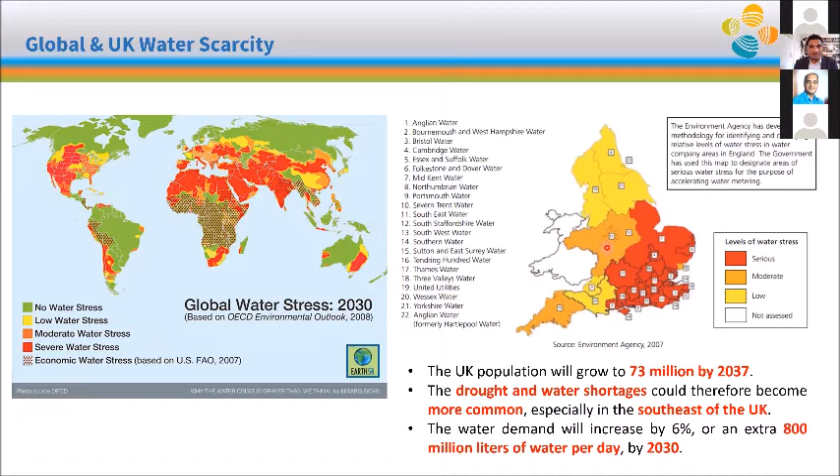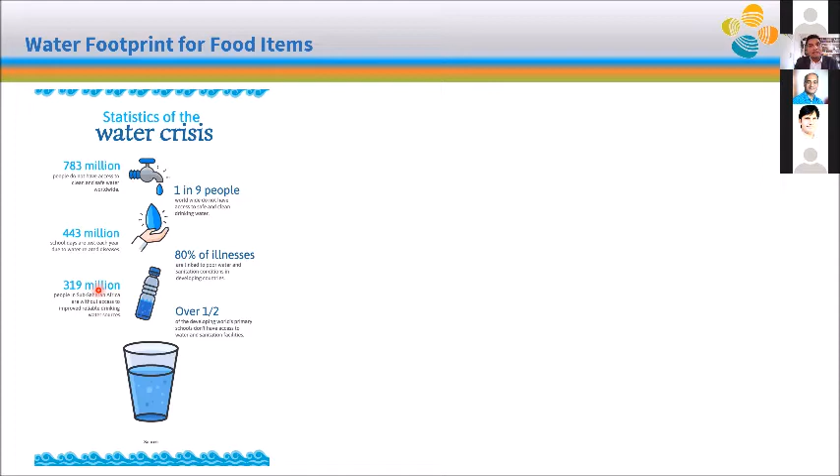This picture is actually very interesting because this water stress is, of course, mainly related to industrialization, but also there is another factor, that people always try to live in better conditions. So urbanization also plays a very big role in water scarcity.

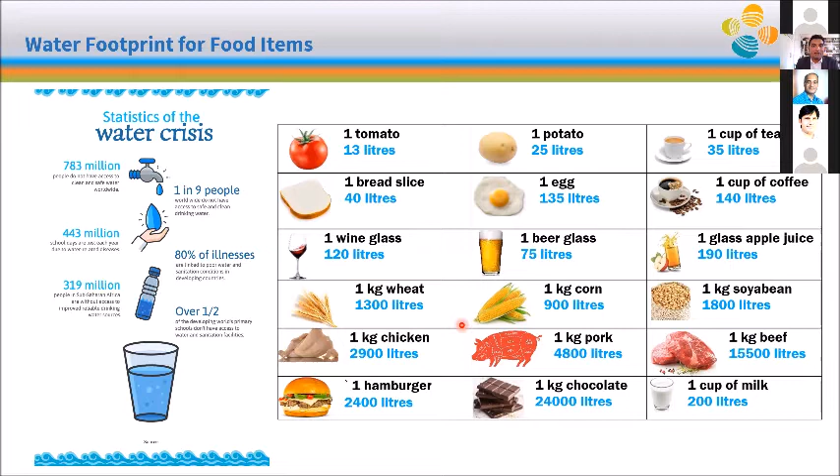And over here, we can see the food that we normally consume on a daily basis, and most of the time we actually don't realize how much water is consumed. Even when we waste the food, indirectly a lot of water is consumed to produce that food. For example, 1 kg of chicken is around 3,000 liters. But I was quite shocked to see that 1 kg of chocolate is around 24,000 liters of water. So many things we consume on a daily basis, and sometimes we waste as well, and we don't realize how much water is consumed to produce those food items. That is actually really shocking, the figures over here. And one of the reasons is actually inefficient agriculture process.

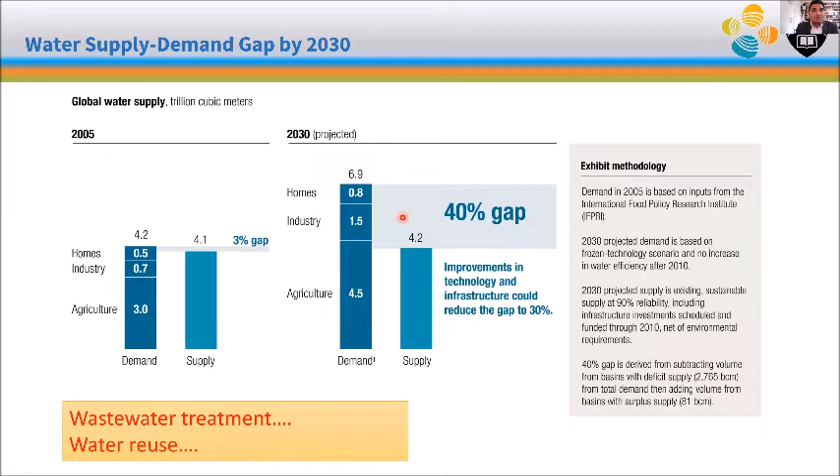So the alternative solution is a seawater desalination process, because seawater is available, and that is the most feasible and practical solution to produce water to overcome water scarcity in the near future.

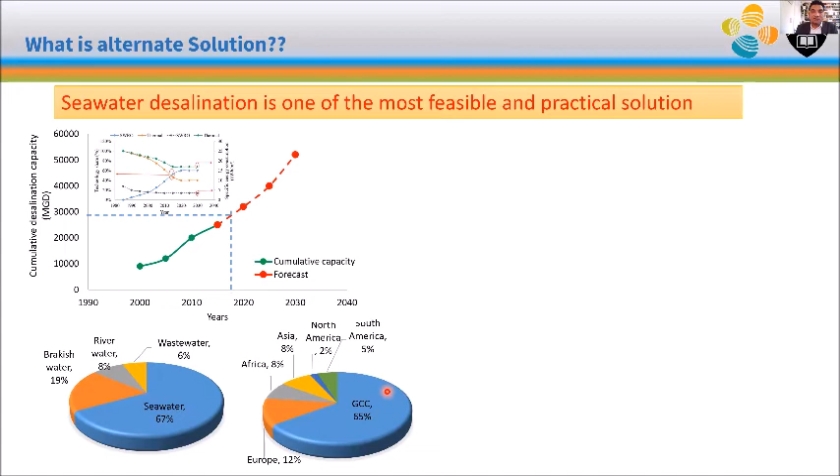Seawater desalination is not new, and today around 20,000 desalination plants in over 150 countries are producing around 28,000 million gallons of water per day. Most of the desalination processes are operating in GCC countries and based on seawater, because in GCC countries the water scarcity, the water condition, is even more severe because of no rain. And over here we can see the installation of desalination processes. Again, we can see that Gulf countries are actually leading because of the water scarcity in the Middle East region, and of course other parts of the world also have water treatment processes.

Those are mostly based on brackish water, like river or lake water, but not mainly on a seawater desalination process.

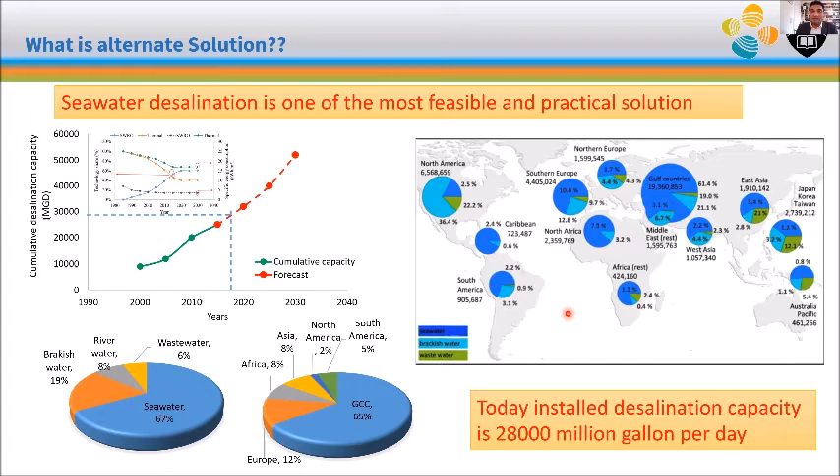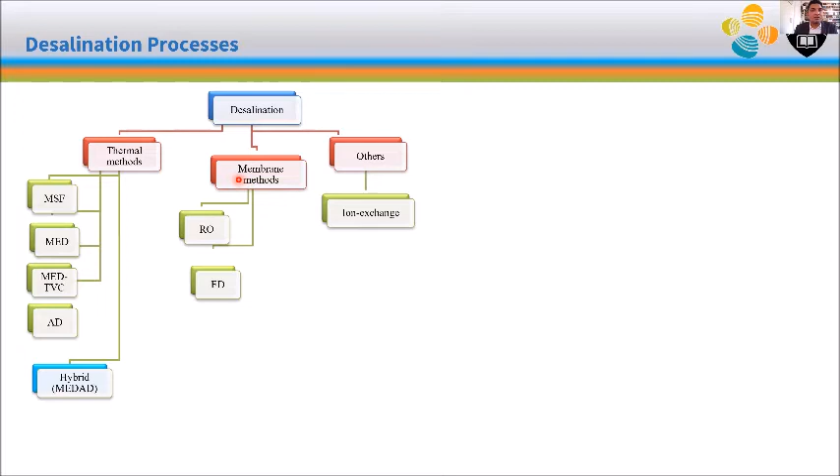So in terms of process, there are two major processes. One is called thermal methods, which operate mainly on heat, like evaporation and condensation processes. The other one is the membrane process, which mainly operates with a high pressure pump across the membrane to overcome the osmotic pressure. Under these two main categories, there are few processes: thermal driven processes have MSF, multi-stage flashing, multi-effect desalination, and some hybrid processes. Similarly, the membrane process also has reverse osmosis, that is mostly used all over the world.

So in terms of installation, it actually varies from country to country and region to region, and the major reason is water availability and the quality of the feed water. Like in the Gulf region, GCC countries, thermal desalination processes are preferable, and the reason is because the seawater condition is very severe over there, and the turbidity of the seawater changes very frequently due to marine activity, like ship movement and all these things, and that is actually not very favorable for the RO process.

That's why the thermal process is very favorable over there. But on the other hand, in other parts of the world, the RO process is very favorable because it is used on brackish water mostly.

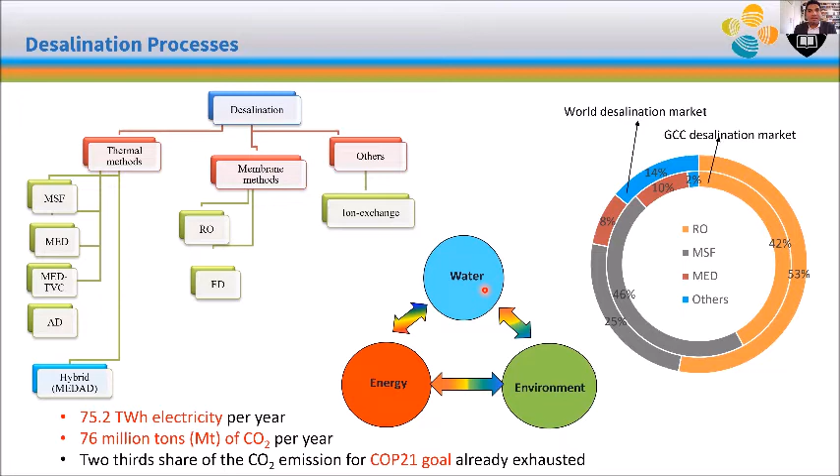But it doesn't matter whatever the process is for water treatment, it must match the nexus of water, energy and the environment. It means we should have a water treatment process that uses very little energy and also helps protect the environment.

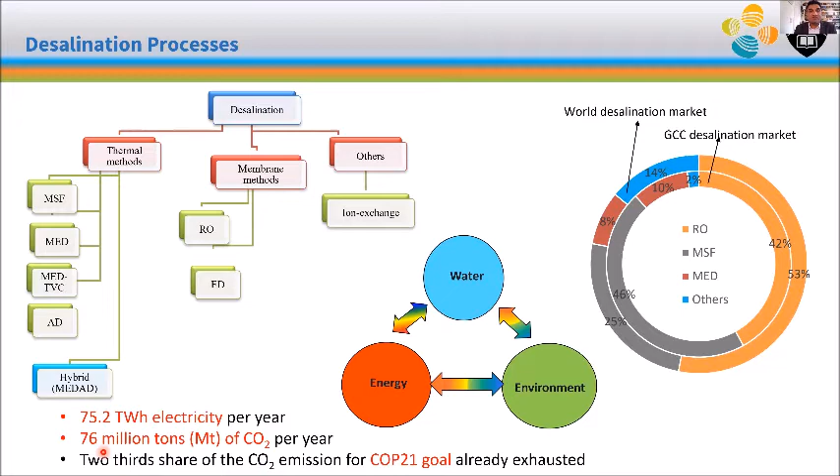But unfortunately, today the conventional processes are consuming over 75 terawatt hours of electricity, and they are contributing around 76 million tons of CO2 per year. That is really a shocking figure.

But if we look into the literature, the story is totally different, because all the reports and papers published in the literature claim that the processes are highly efficient.

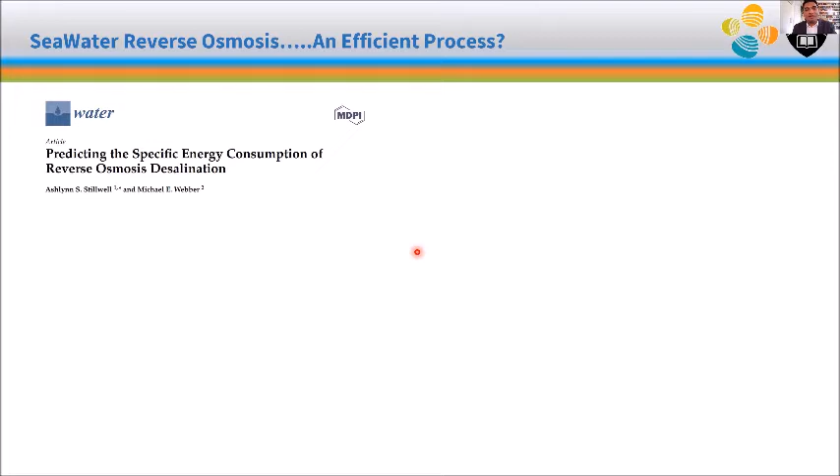For example, if we look into processes like reverse osmosis, a membrane-based process, there are a lot of highly reputable journals and good reports from many consultants. Everyone claims that the process efficiency is very high. It's like they reach to the sky.

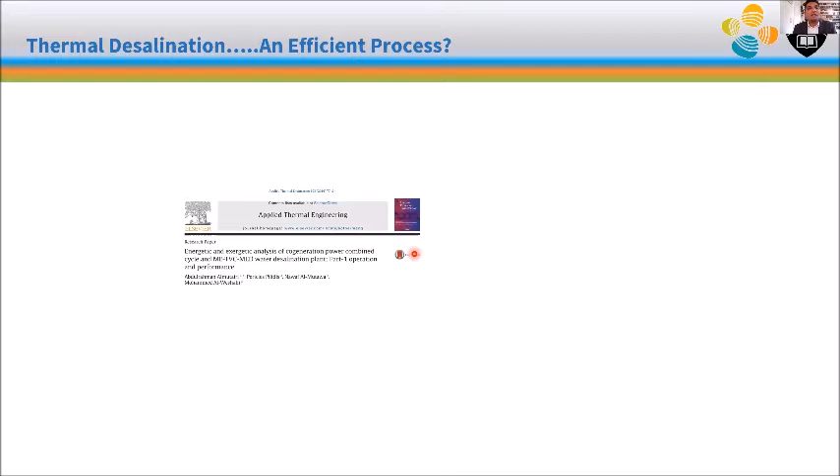On the other hand, the thermal desalination process people are also not behind. They also claim the same thing, that the processes are very efficient and they have reached the highest limit.

So now the question is, which process is efficient? Because if we just look into the literature, it's very confusing. Every process claims to be very efficient, but if we look into the energy consumption and the CO2 emission, that is also very high. So it's a bit of a contradiction.

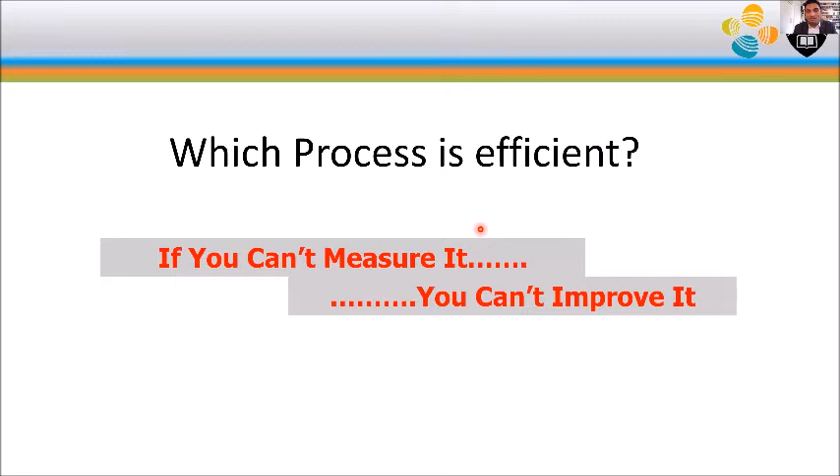So we try to find out first how we can actually evaluate the process. Because if we can measure the efficiency, then we can improve the efficiency. Without measurement, it will be very difficult to find out the level of their performance.

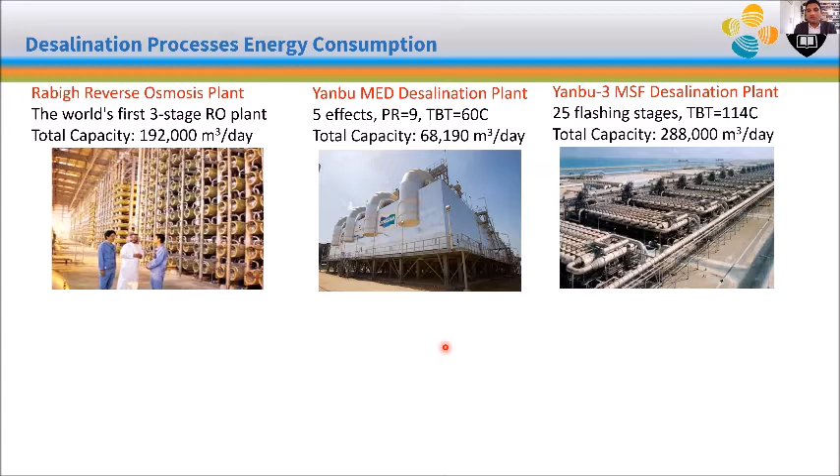As I mentioned earlier, there are three major desalination processes installed all over the world: reverse osmosis, multi-effect desalination, and multi-stage flashing. These are the three largest types of plants in the world, with their capacities and locations. I took the data from the literature, and I also mentioned the average energy consumption from different plants all over the world, around over 40 plants' data from all over the world.

If we look into these numbers in terms of energy, let's say the RO process consumes around 3.5 kilowatt hours of electricity per cubic meter. A MED plant consumes electricity as well as thermal heat, and also the MSF consumes electricity plus heat.

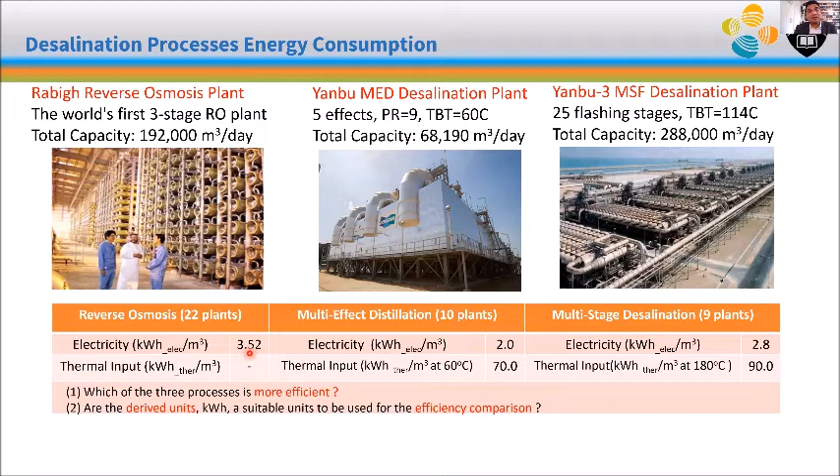So if we just look at the numbers and try to compare these processes, one can easily say that the RO process is very efficient. If this is the case, that is not a true statement, because we forgot that if we just look at the numbers, we are comparing dollar with dollar, but we forgot that one is an American dollar and the other is an Australian dollar, and there is a conversion factor in between.

So the same applies over here: one is electricity and one is thermal heat, so we cannot compare them one to one. This is a major misconception based on the conclusion that the processes are efficient. In other words, electricity is not the same as heat, that is not the same as primary fuel, and that is not the same as standard primary energy.

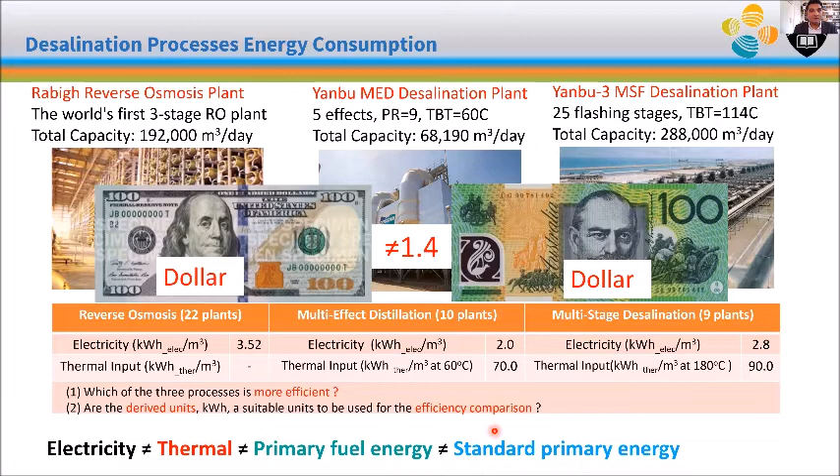This standard primary energy means the fuel that is consumed at the first point in the combustion chamber, followed by the process to produce the electricity and the heat. So this is a typical plant.

Normally the power plant and desalination plant are actually installed together, because if they are installed together, most of the utilities can be shared between the plants, and that actually improves overall performance of the system. So this is the typical configuration of a power and desalination plant.

There is a combined cycle: a gas turbine followed by a steam turbine, and then followed by the three types of desalination process. So now the question is, if let's say we spend one dollar on fuel introduced into the power plant, it will produce electricity in the gas turbine cycle and the steam turbine cycle, and some heat in terms of bleed steam will be utilized in MSF and MED plants, along with electricity for all three plants.

So then how can we apportion this energy consumed in terms of fuel to electricity produced and to the water that is generated through this process? This is the big question, because if we just follow the mass flow rate, that will not give a correct picture because it doesn't include the quality of the working fluid. That is what we call exergy analysis, because analysis based only on energetic form, considering mass flow rate and not the quality of the working fluid, will not give the true picture.

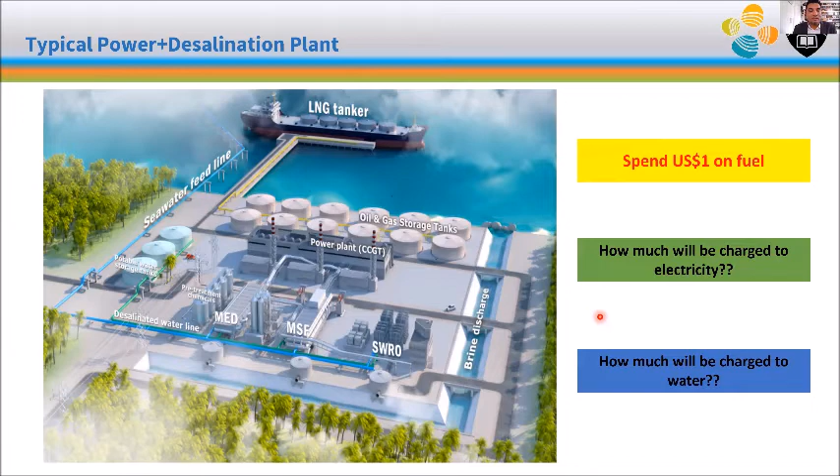So we try to develop a thermodynamic framework that can be used to compare all desalination processes irrespective of the energy utilization. We come up with a figure we call the standard universal performance ratio. Earlier there was only performance ratio, based on two different forms of energy, thermal and electricity. So we derive this formulation and framework to find out the conversion factor, how we can convert different forms of energy into primary energy, bringing it back to the initial state of energy, so that we can add up all the energies because they'll all be on the same platform. Then we can compare across technologies because we are comparing on a common platform.

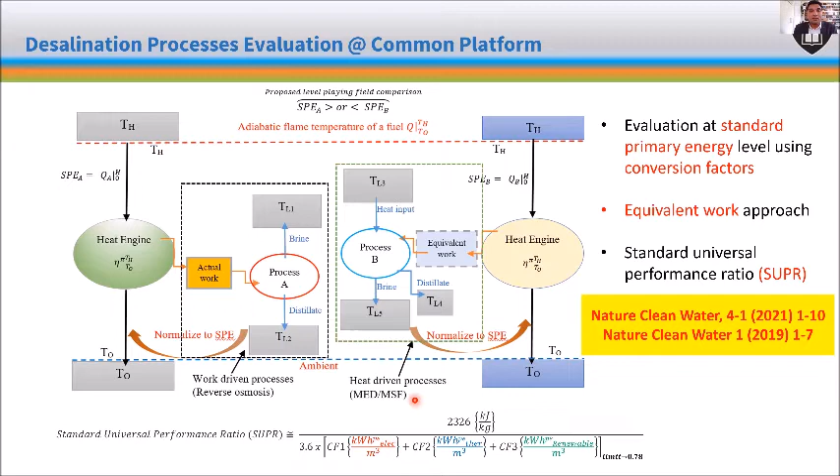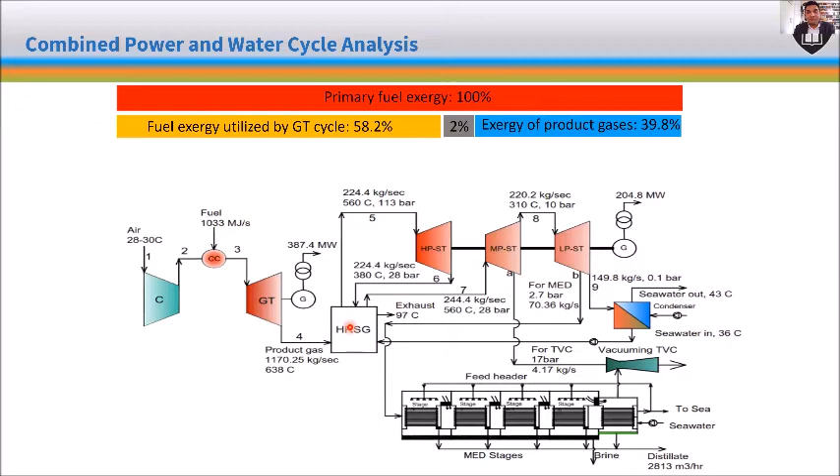After successful derivation of this framework, we apply it to real plant data from Saudi Arabia. Let's say this is a typical CCGT plant, and the fuel consumed, the exergy, is 100%. 58% is consumed by the gas turbine cycle, 2% is around losses, and 39-40% is exergy carried by the product gases after the gas turbine, going to the heat recovery steam generator. Out of these, 36.8% is actually consumed by the steam turbine cycle, and only 3% is consumed by the desalination cycle, because the bleed steam from the last stages of the turbine has already produced electricity and done its work.

So now this is almost dead steam, but this is very good for the desalination cycle, because the desalination cycle operates at low pressure and low temperature. Combining this CCGT power plant with thermal desalination is an excellent thermodynamic synergy, because both systems operate at high temperature and low temperature respectively. This synergizes very well to get the maximum from what's available.

Based on this exergetic analysis, we derive factors to convert different forms of energy into primary energy. Converting electricity into standard primary energy, the conversion factor is around 2, and that indirectly means around 50% power plant efficiency. That is the typical efficiency of a CCGT power plant, from 47 to 55%.

But this was quite interesting, the second one: converting low pressure steam into primary energy. So 1 unit of standard primary energy can produce 10 units of that low pressure steam used in a desalination cycle. Based on these two conversion factors, we can convert the different forms of energy that I showed at the start for the 3 plants into primary energy, and then we can find out how much is the performance ratio for the different plants.

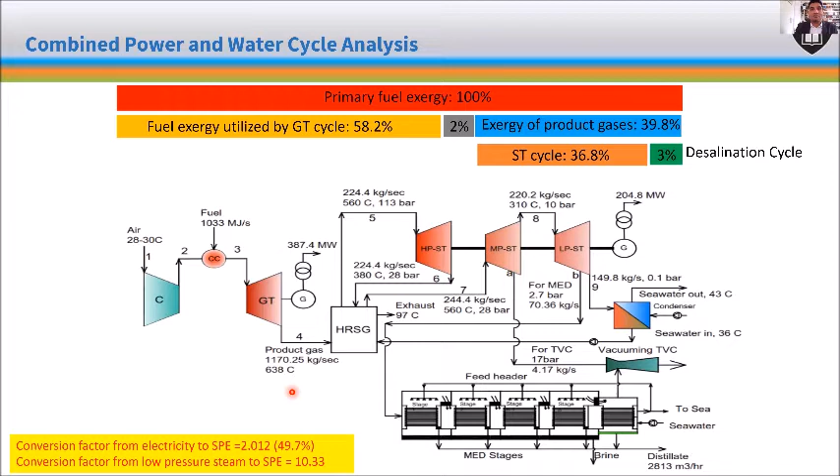So here we can see the answer. Here is all 40 plants where we took data from different literature. We applied our thermodynamic framework and plotted this in terms of a ratio of cubic meter per kilowatt hour, standard primary energy based, relative to the thermodynamic limit. Why do we compare with respect to the thermodynamic limit? Because it's the standard formulation, irrespective of the process. This thermodynamic limit is that 1 cubic meter of water can be produced per kilowatt hour of standard primary energy, irrespective of the process. This is a theoretical limit that we cannot achieve, but it's a good reference to compare existing plants.

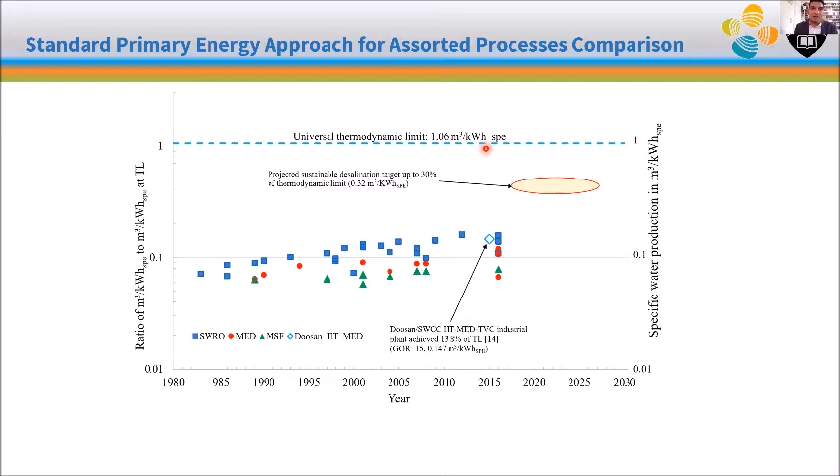And we can see very clearly that all the desalination processes available today, those applied commercially, are only operating at 10 to 13% of the thermodynamic limit.

So it means all the literature claiming highly efficient and improved processes, those statements might not be true, because if we compare with the thermodynamic limit, that is the standard, the process is only at 10 to 13% of the thermodynamic limit.

So now we can see very clearly that we have a very big gap to improve, and all the processes are not efficient, not sustainable. We have to improve the process to get future sustainability.

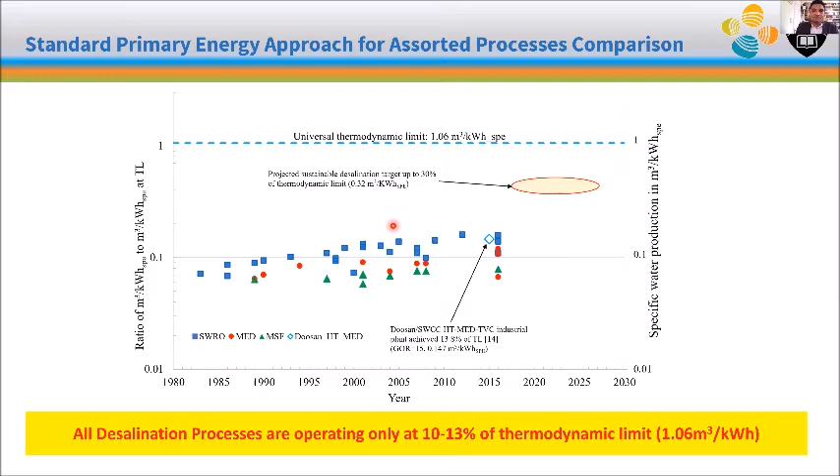So to learn the lesson of how it was improved in the past, we gathered data from history. Desalination, as I mentioned, is not new. It started from the 15th century when ships were sailing in the sea and people drank the water. The ships normally took 3 to 4 months reaching their destination.

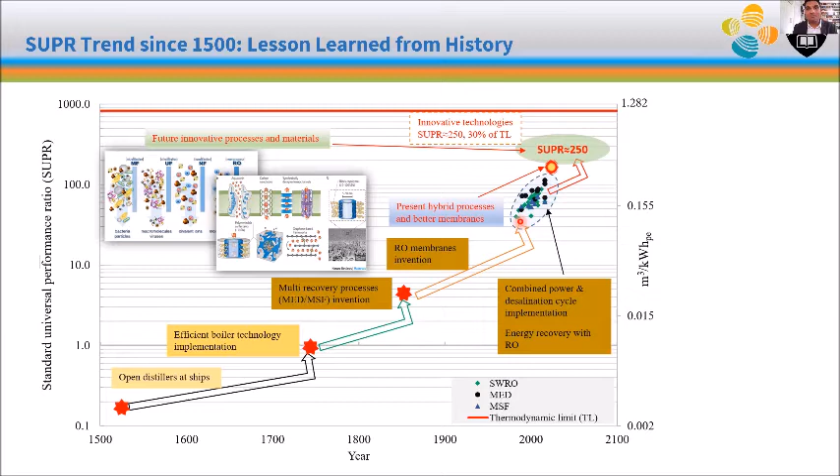The reason is that all 3 technologies are still the same, invented from the start, with no change in the technology. So the lesson learned is that we can only get a high jump in performance if we change the technology. If we don't change the technology, just improving the process can give a little bit of gradual improvement, but not a high jump in performance.

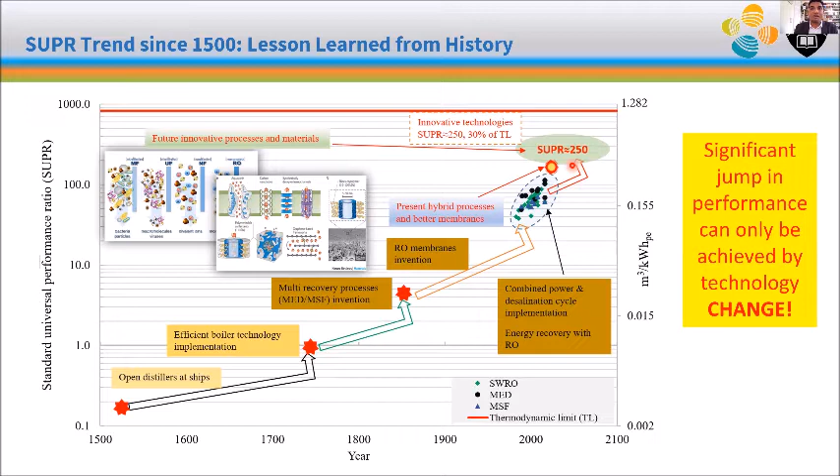So today we are at the point where we have to work to find innovative or out-of-the-box solutions, so that we can again get a high jump in performance to achieve this sustainable processes zone.

So we started looking into the limitations of the conventional system. As I mentioned, there are 2 major processes, thermal and membrane. For the thermal process, the limitation is the operational temperature. The highest temperature is around 65 degrees centigrade.

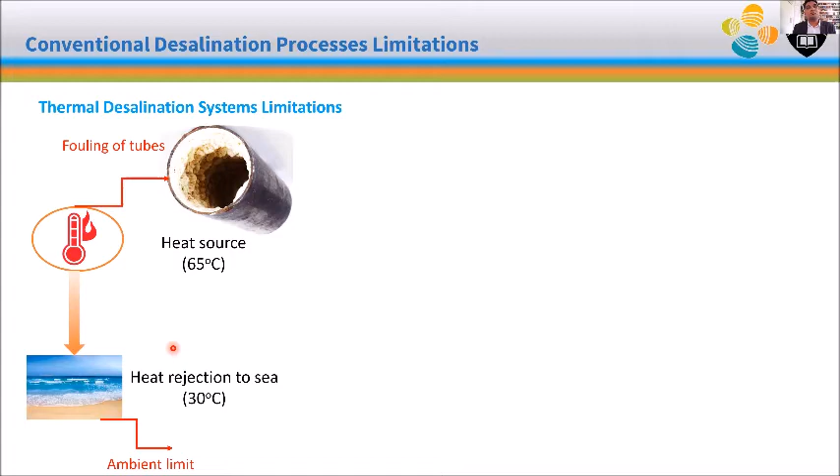If we operate higher than that, there will be scaling of salt fouling on the tube surfaces. And the lowest temperature is controlled by the seawater-cooled condenser, and that is around 40 degrees centigrade if seawater is at 30 degrees centigrade.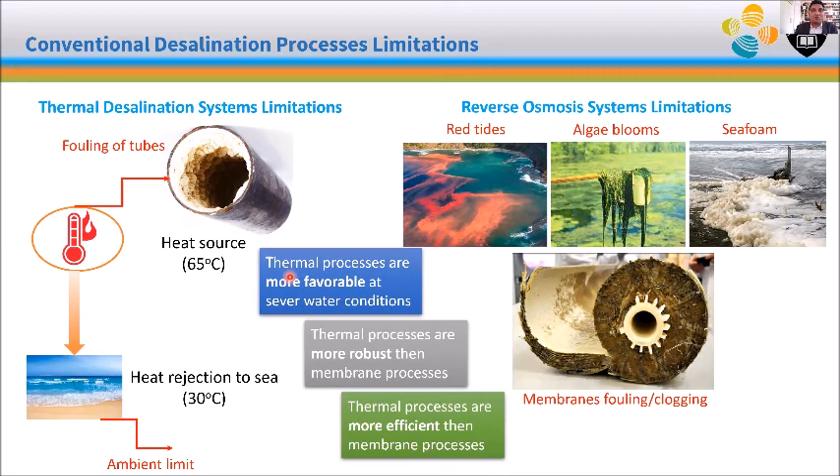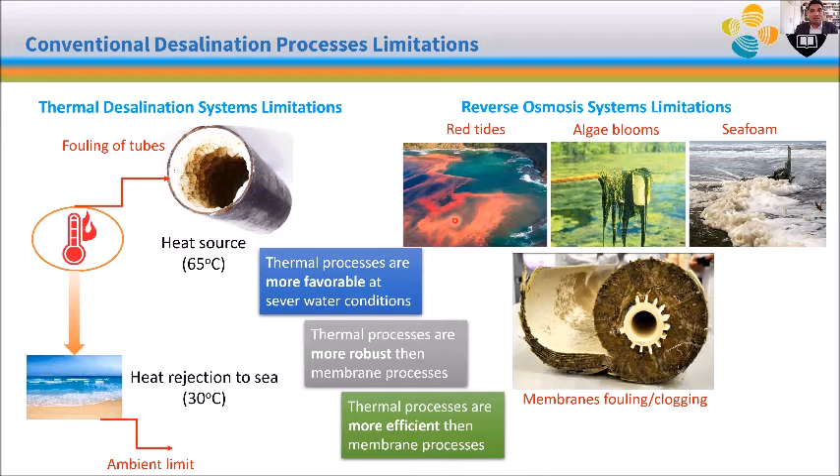Similarly, the RO process is also limited by seawater quality, and it's actually very sensitive to seawater quality, because if seawater quality changes, they can easily foul and clog the membrane. But thermal desalination processes are quite favorable and robust in terms of seawater quality. Even though seawater quality changes, it doesn't impact the process, and the produced water quality also remains the same.

So we start looking into a thermal desalination process. This is a typical multi-effect desalination process. As I explained earlier, this is a bleed stream from the last stages of the turbine, and it is

supplied to the tube side of the first stage. We call it a stage because it's multi-effect, meaning multiple heat exchangers arranged in parallel manner.

On the outside of the tube there's a seawater spray, and the vapor produced over here is actually used as a heat source to the tube side of the next stage. This will be condensed, and the heat of condensation will be recovered to evaporate more water in the same stage. So this evaporation and condensation continues until the end.

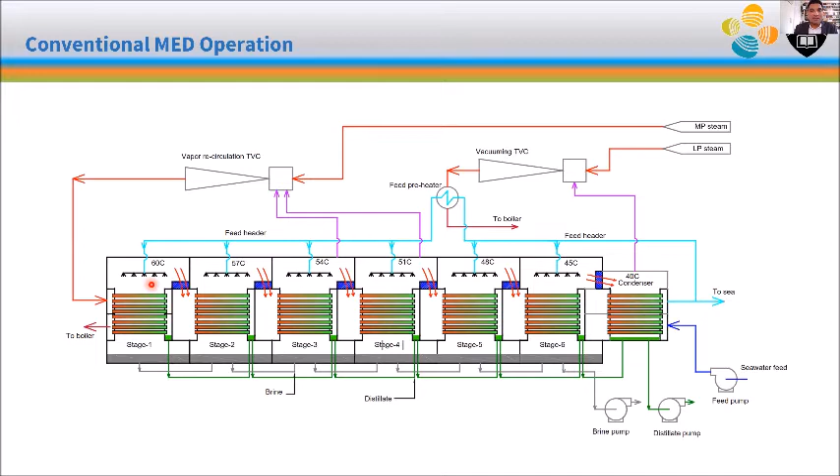So the last stage vapors are condensed in the condenser. This is where the limit is 40 degrees centigrade because it's cooled by seawater. So the overall process is controlled by these two temperatures, and that's why the number of recoveries is also limited to 6 or 8, and that's why the performance is also limited.

So we try to find out how we can overcome this limitation so we can improve the process. We came up with the idea that we can disintegrate this condenser from the last stage and introduce our adsorption cycle.

This means if the last stage vapors, typically at 40 degrees centigrade, are introduced not to the condenser but to the adsorption cycle, we can bring down the temperature to as low as 5 to 7 degrees centigrade, because the adsorbent, the silica gel, typically used as an adsorption chiller, produces water at 5 degrees centigrade.

So we assume that the temperature can be extended from 60 degrees to 5 degrees centigrade, and we can insert more recoveries with the same given heat input, and proportionally the water will increase.

So here it shows that from 60 to 40 degrees is typically 6 to 8 stages, but if we overcome this ambient limitation and bring it down to 5 degrees, we can actually install 12 to 15 stages, and accordingly the water production will be a 2-fold or more improvement.

So our second target was how we can improve the top brine temperature by introducing some nanofiltration. I will come back to that in the last few slides.

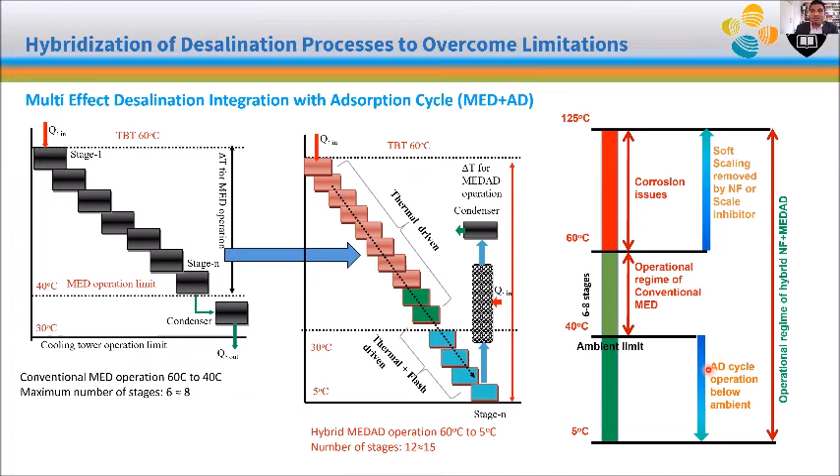First I will explain how we introduced this adsorption cycle and how we demonstrated this process. This is a small simulation showing how the system works. Let's say this is a heat source coming out from the last stages of the turbine.

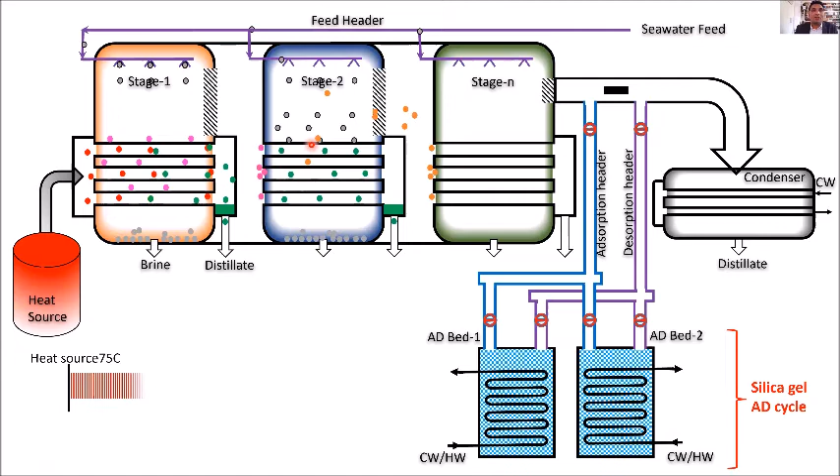It's introduced into the tube side, and outside is a seawater spray. The evaporation from the first stage is used as a heat source for the second stage, and the heat of condensation is recovered and used to evaporate more water. This process continues until the last stage, and from the last stage, the vapors are condensed in the condenser.

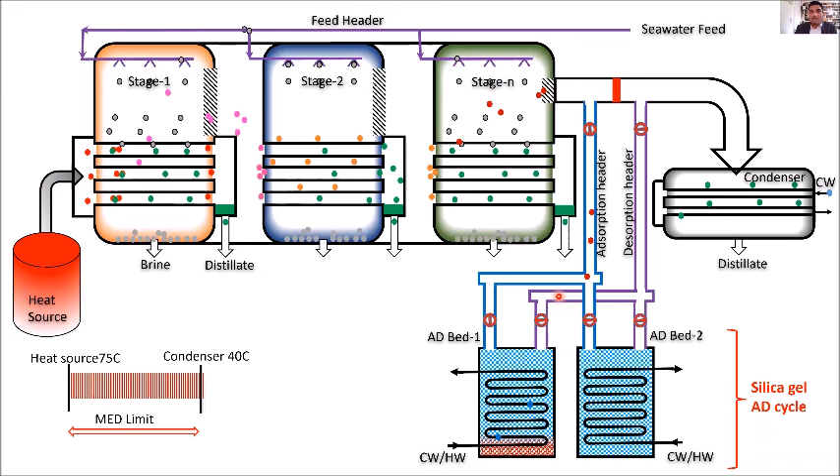So this is a typical MED, how it works, and that's why the limit is 40 degrees centigrade. What we did was bypass this condenser and close this valve, and the vapors are now introduced into the adsorption chiller, where they adsorb onto the silica gel, desorb, and condense in the condenser. So the condenser is not directly linked to the last stage, and this is where we break the limitation of 40 degrees centigrade, extending the operation temperature to as low as 5 to 7 degrees centigrade.

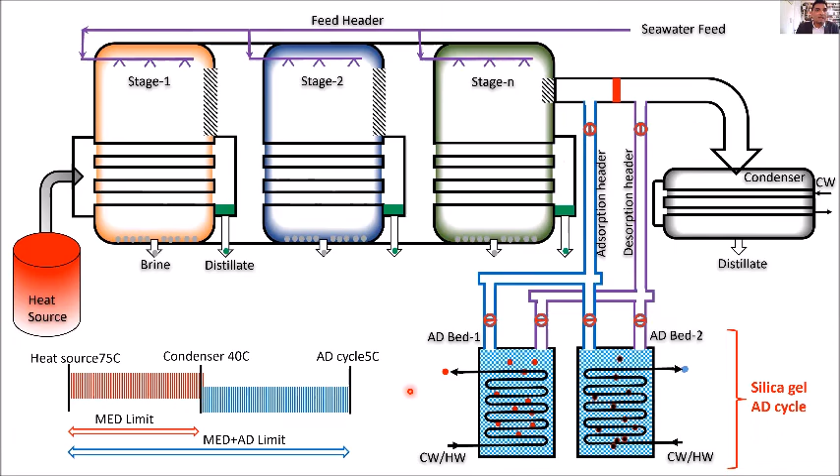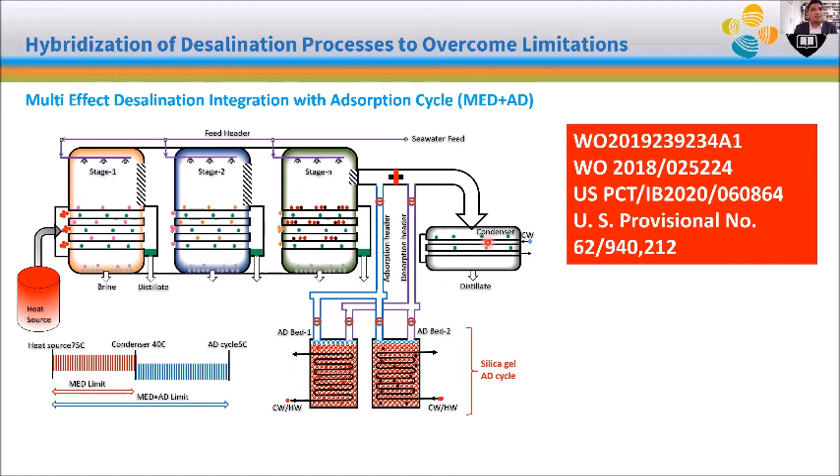So we have three different patents on this hybrid desalination process. To demonstrate this hybrid concept, we designed, fabricated, and installed an adsorption and MED plant.

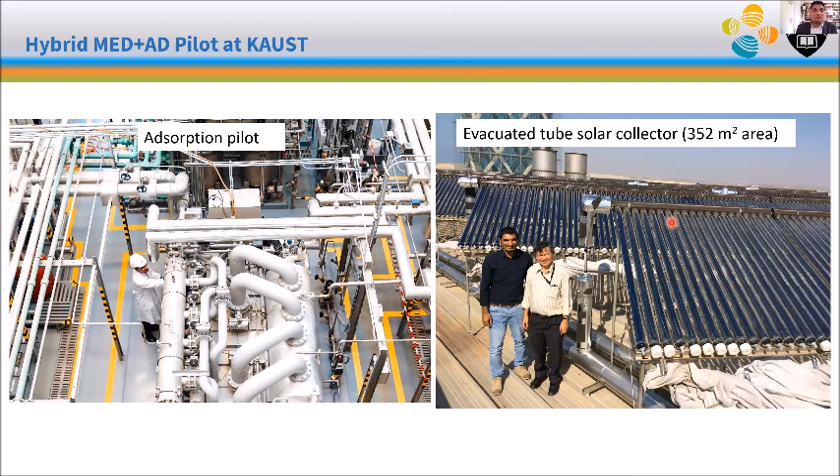And this is our MED plant, 4 stages MED, and the 2 big pipes you can see going down below the mezzanine floor are our adsorption cycle. This mezzanine floor was built on top of the adsorption cycle, and then the MED cycle was integrated with the adsorption cycle using these 2 big pipes.

We have a valve here that we can close if we want to operate as a conventional MED cycle. We also have heat storage tanks, 3 cubic meters each, around 12 cubic meters of hot water total, which helps us operate for around 4 hours even after the sun is down, in the evening.

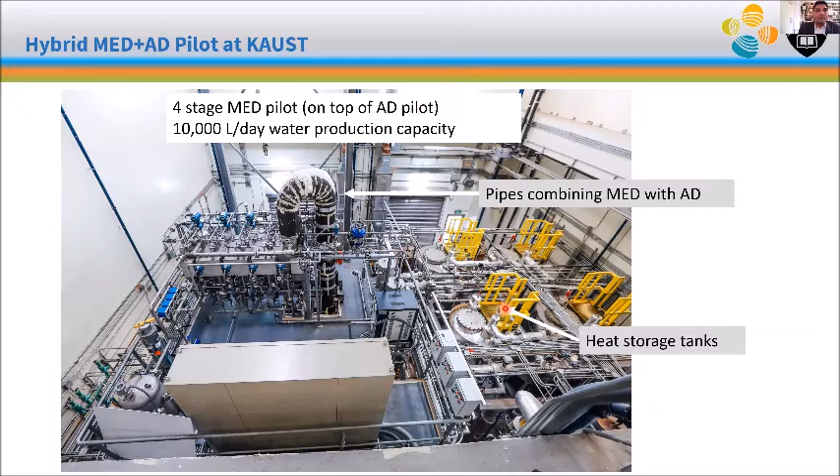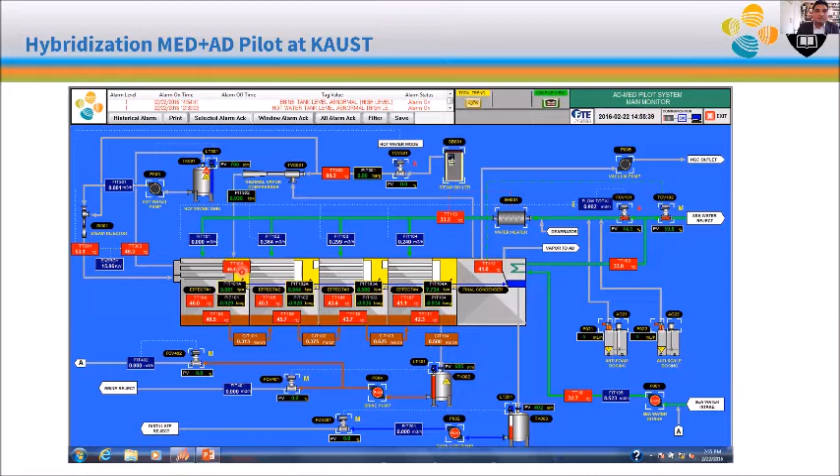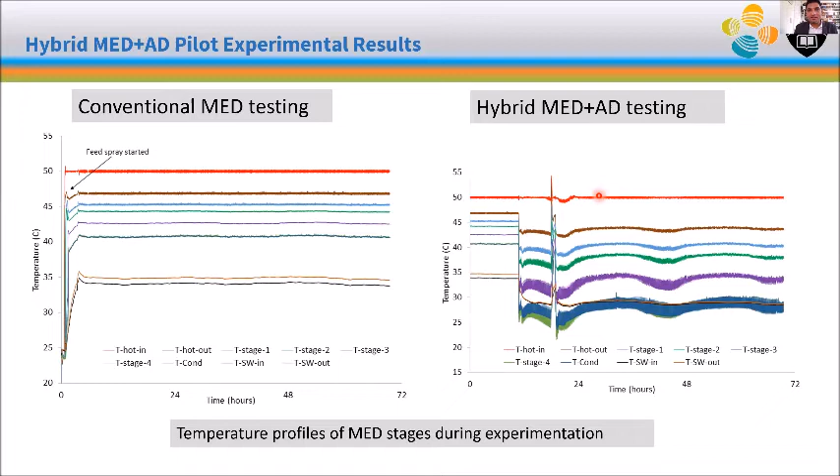After these 72 hours, we open the valve and link it to the adsorption cycle. We can see clearly the temperature was pulled down by the adsorption of the silica gel, but it's still around 25 degrees, which is a hardware limitation because we only have 4 stages and maintain 50 degrees centigrade. So we can introduce more stages at the bottom, or there's the gap available, or we can reduce the top brine temperature to test down to 5 degrees centigrade.

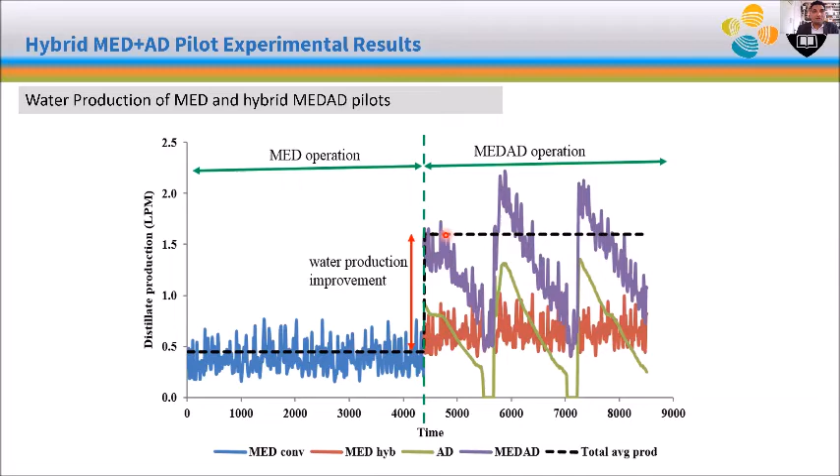This is the water production profile. This is a conventional MED system for first operation, and when we linked it to the adsorption cycle, we can see the water production was boosted to around 2 to 2.5 fold at the same heat input.

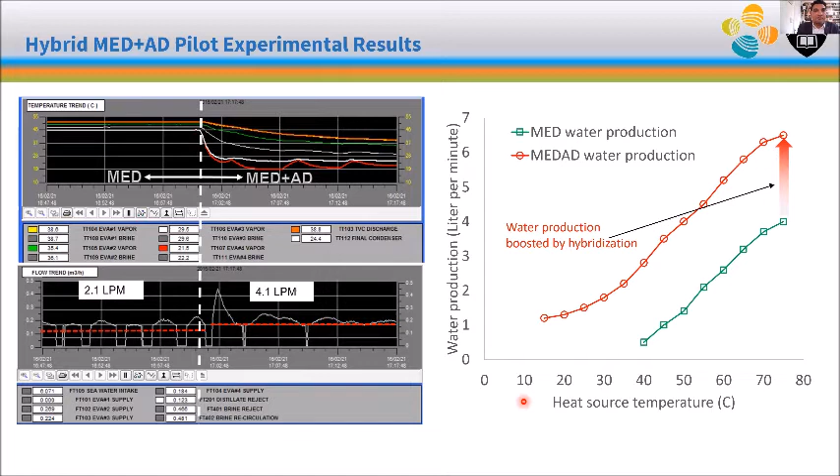On top of that, the conventional system is limited to 40 degrees centigrade, so we don't have that limit. Our system can go as low as 5 to 7 degrees centigrade. This was a successful demonstration of our hybrid MED+AD pilot.

Then we realized that actually the process can also be hybridized with the membrane distillation system to run as a tri-hybrid system. Why did this idea come into our mind? Because the membrane distillation process uses a hot front and a cold front to extract the vapor from the feed across the membrane.

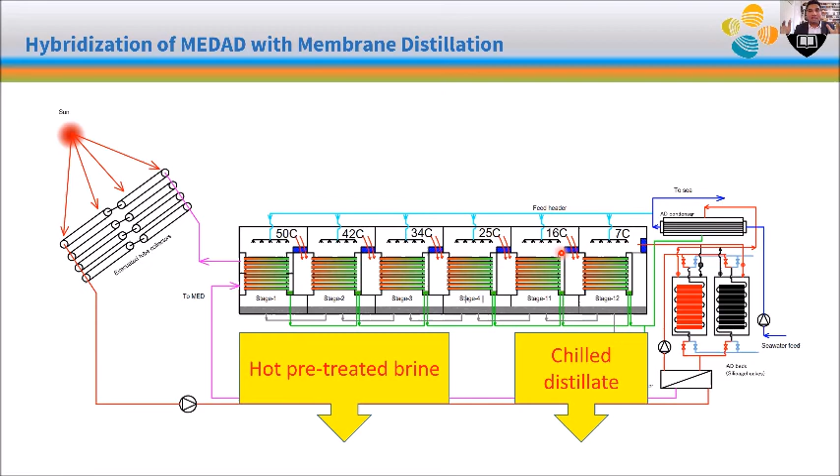This is again the schematic of our same system, and we realized that we have heated brine coming out from the first few stages, around 40 degrees centigrade, and it is pre-treated brine. We also have the chilled distillate coming out from the last stages, operating below ambient conditions. So this is a very good hot front and cold front for the MD system.

Just to remind again, this is how the MD system works. There's a membrane, and the hot feed is circulated on one side, with a cold front on the other side, and that helps extract the water vapor through the membrane and condense in the distillate, or condense on the wall surface of the cold front.

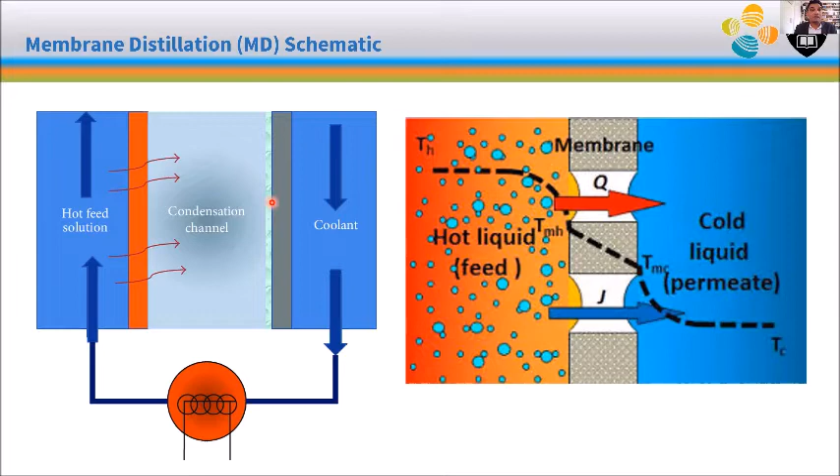By using the same concept, we hybridized the MEMSYS system that produces membrane distillation. We can see over here, this is our hybrid system with the MEMSYS system to run as a tri-hybrid system. We use the last 2 stages' distillate as a cold feed, and the first 2 stages' brine as a hot feed, to extract more water within the given energy input and water input.

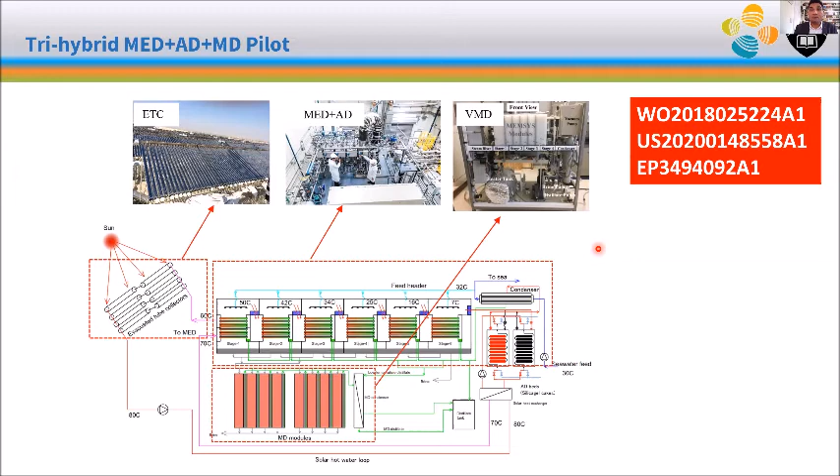There are 2 major benefits we were trying to get: first, if we extract more water from the given feed input, we are reducing the chemical injection because the recovery will be more. Second, the CO2 emission will be reduced if this system is operated in conjunction with a power plant. So we have another 2 patents on this system.

Here are the results for this tri-hybrid system. The red dots here are our MED+AD water production. This time we normalized the water production into liters per meter square per hour, because this gives us a very good platform to compare with any system, as long as we have water production per meter square, whether the system is reverse osmosis or a thermal system.

If we can normalize it in terms of per meter square area available, we can actually compare the system. So that's why we preferred to present in liter per meter square hour, so that we can compare it with any other system. The gray dot here is actually membrane distillation water production.

That is not consuming any form of energy, because it's just more water extraction from the reject of our hybrid MEDAD system. So this chart shows the overall results.

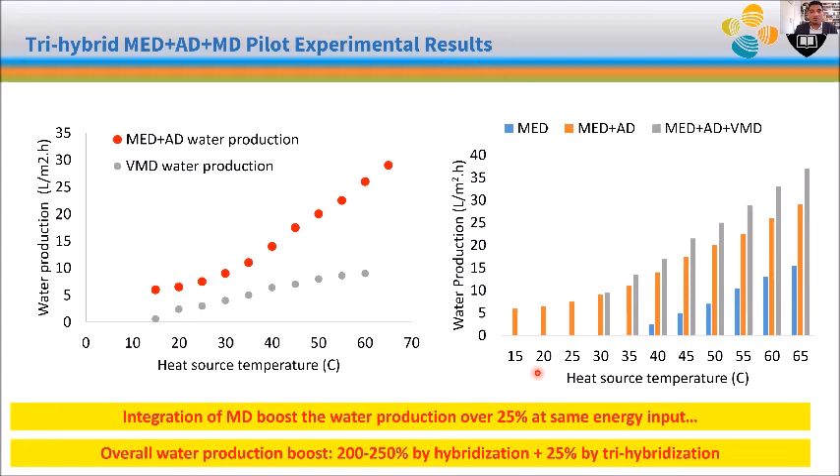The blue line is the MED water production, the orange line is MEDAD water production, and the gray line is the tri-hybrid MEDAD plus MD water production system. We can see very clearly that the hybridization boosts the water production to over twofold, around 2.5-fold, and with the MD hybridization, we achieved another 25% water without consuming any energy.

If we go back to the chart I showed at the start, we can see our point marked here, and we were able to achieve around 20% of the thermodynamic limit as compared to 13% of conventional systems. Still, we believe that it's not a sustainable zone. We are expecting to achieve around 30% of the thermodynamic limit, because most thermal systems, like IC engines or even the power plant I showed, can achieve up to 50% efficiency. So that is what we call the sustainability zone.

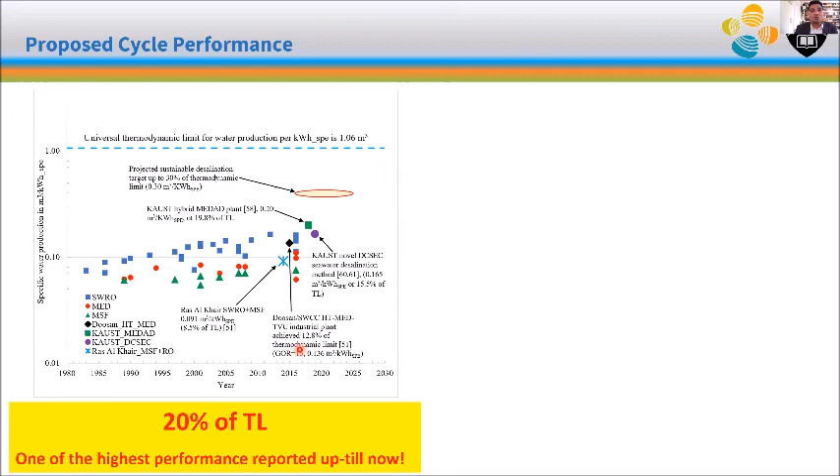So we have to try. It's still not an excellent system. We have to try again to achieve up to 30% of the thermodynamic limit.

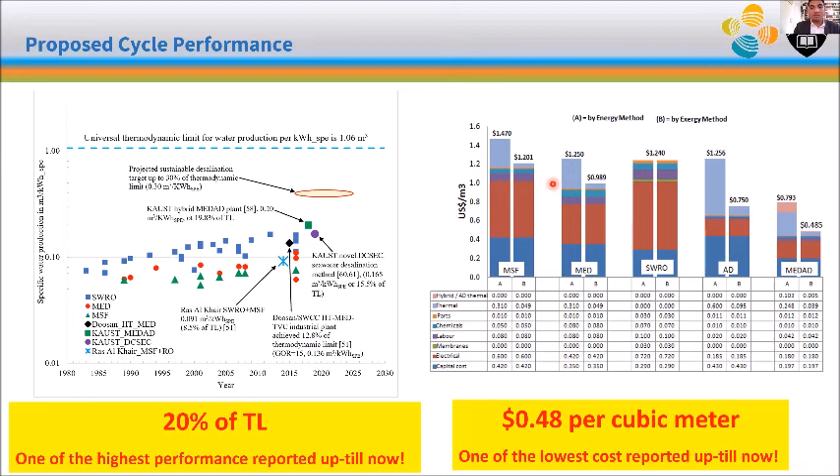We also did a life cycle costing analysis and compared it with the conventional system. We can see that our system was able to produce water at around $0.48 per cubic meter, one of the lowest water production costs compared to other systems like RO, which is around $1 per cubic meter. So our research is not only limited to the labs.

We spun off a company based on our 3 patents, called MEDAD Technologies. We got our first contract to install a 100 cubic meter per day water plant, commissioned in 2017. After successful operation of this plant, we got another contract for around 5,300 cubic meter per day capacity, to be installed at Yanbu.

Yanbu is the world's largest desalination facility, where they have RO, MED, and MSF water treatment systems. The beauty of this system is that we will use the reject from their RO, and the waste heat from their flash tank and other systems at the plant, and boost the recovery from 40% to 59%. So we will produce around 19% more water without consuming any energy. That was the biggest trigger for this contract.

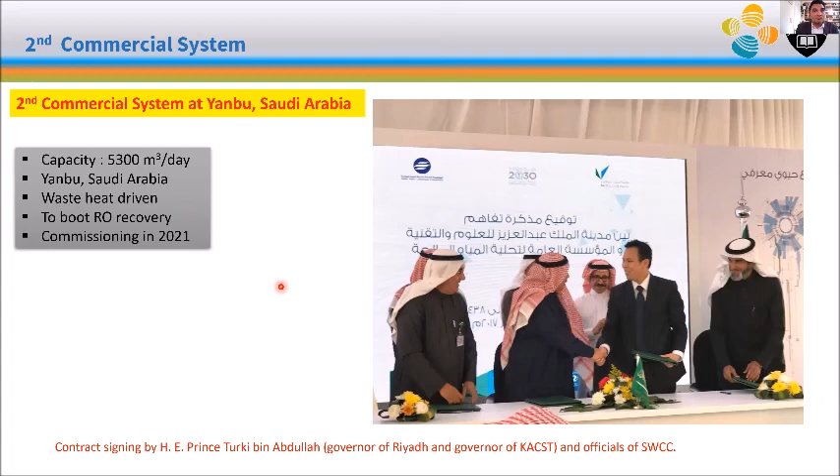We were supposed to commission and install this plant by December 2021, but because of COVID it was delayed, and we are now expecting commissioning by mid of next year. It's in process now.

In terms of future roadmap, we already have successful commercialization of our technology, but of course we are looking into zero liquid discharge processes. We have another patent on that, and we are trying to integrate our system with ZLD so that we can produce a 100% zero liquid discharge system for future sustainability.

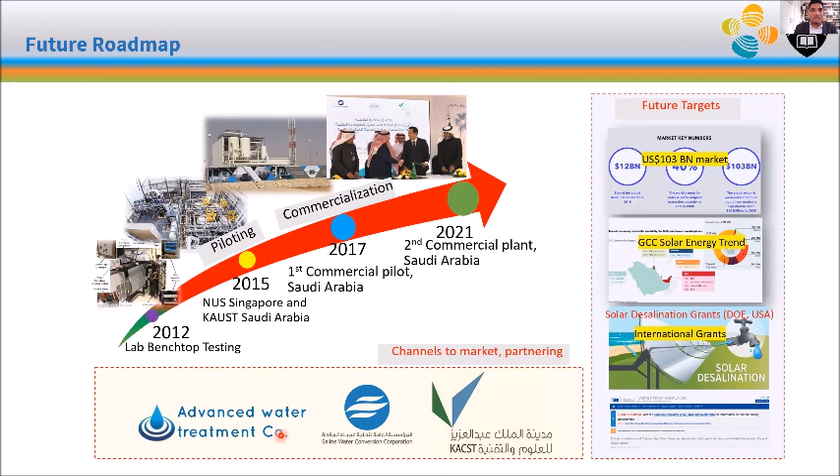In addition, we are also looking for grants available for solar thermal desalination processes. We also have a channel to the market, working with advanced water treatment technologies companies, and also SWCC in Saudi Arabia. Our technology was highlighted in many media outlets, like Nature Middle East, Yahoo Business,

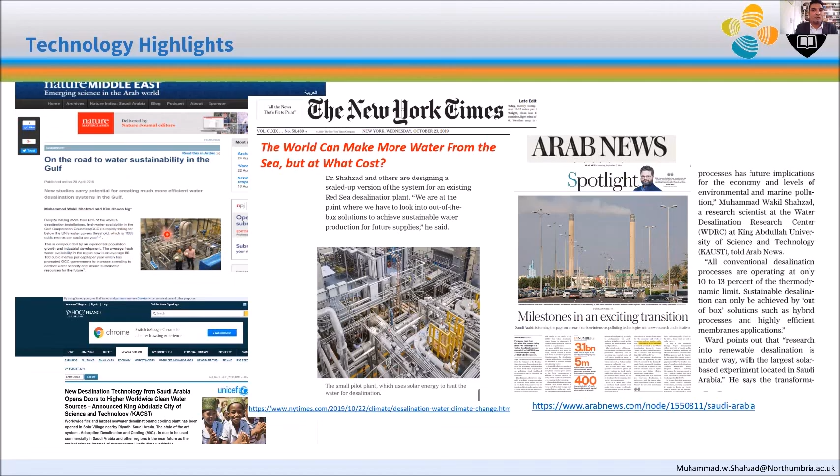New York Times, and Arab News, mentioning it as one of the most sustainable and most environment-friendly processes in terms of water treatment.